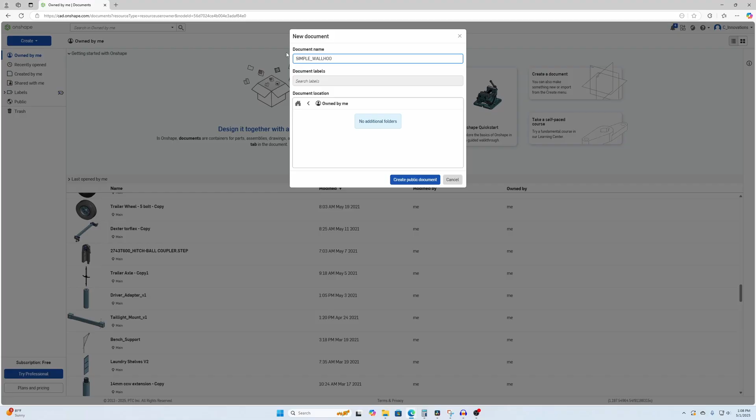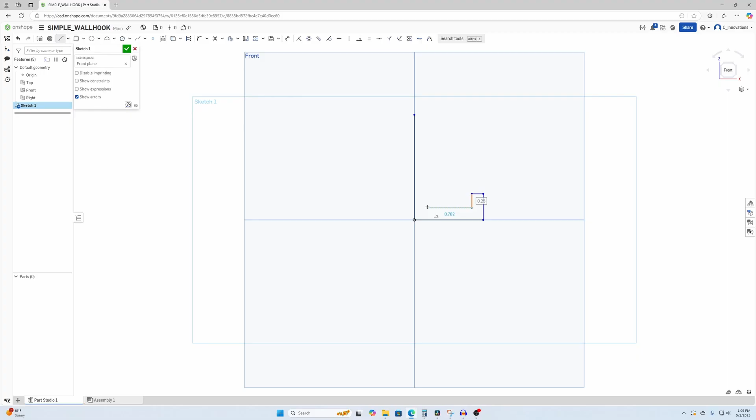Step 1, hit your sketch command. Let's go ahead and select that front plane, orient it up here, and we're just going to draw an L. We're going to use our line command, left click there, snap down to the center, make sure it's vertical, drag it over. We'll worry about the actual dimensions at the end. I'm just kind of roughly drawing in. You see I hover over there and it lets me snap out so those lines are collinear.

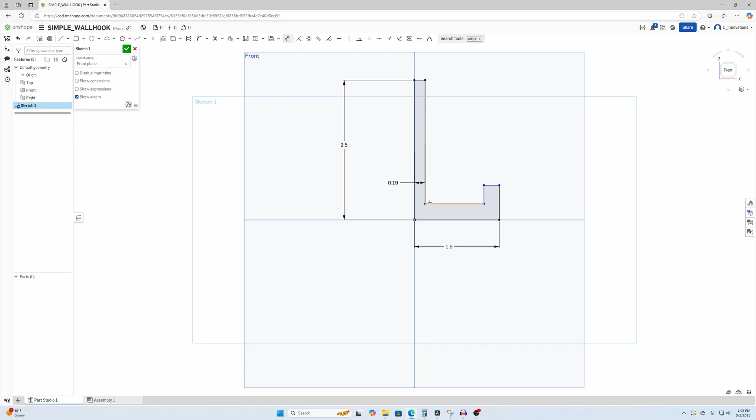So then we're going to hit the D command to dimension this thing. Let's make that 2.5 tall, 1.5 in that direction. Let's make it 3/16 thick. Three-eighths tall. There we go.

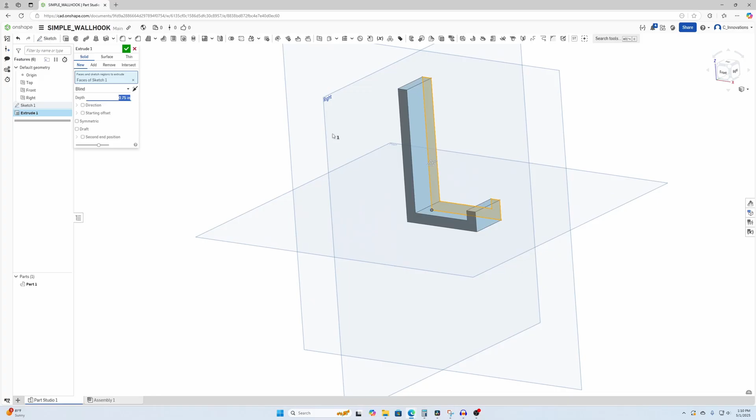Finish that sketch, hit extrude, select sketch number 1. We will make that 3/4 of an inch as an extrude. And we're going to go ahead and add our holes to this.

Hit sketch again, select that surface there. You can orient it to the right. Hit your circle command. And you see I can snap to that midpoint. Just hover over it and drag down. Create a circle, do the same thing.

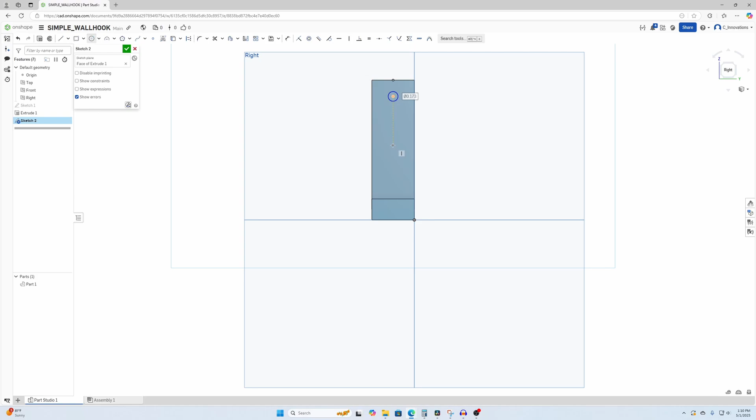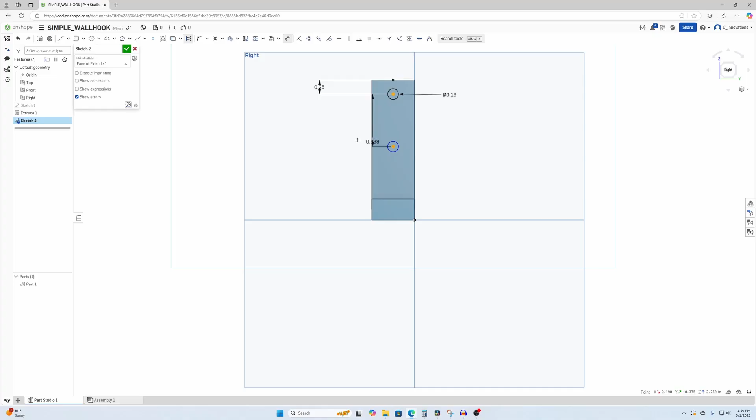I'm going to hit the letter E to make these equal as a constraint. Hit D for dimension. Let's dimension from the top. Let's do 0.25. Let's make these holes 0.19. Distance apart, let's do 1.5.

Okay, there we go. Hit extrude. Select sketch number 2. This time again, hit remove. Pushes those holes right through there. We're going to do up to next.

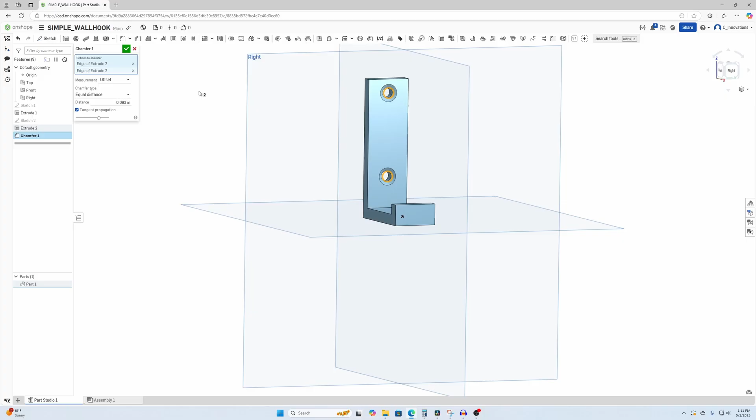Then we're going to go to your chamfer command. You don't have to do this. Makes it a little easier or a little nicer when you do like a countersunk screw. Okay, 1/16 of an inch. That should be plenty good.

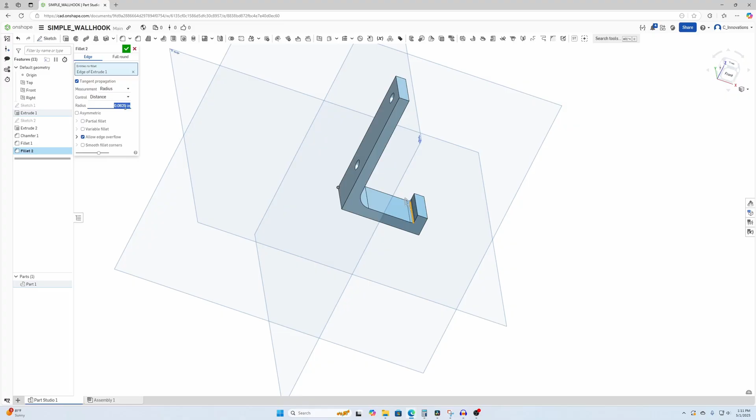Let's go ahead and add some radii in here, or a fillet to reduce the stress concentrations. Select there. Let's make that one 0.25. Let's do another fillet over here. Let's make that 1/16. And we'll do the same there.

Okay, there it is. A very simple wall hook. You can model yourself, customize however you want in a very short period of time and 3D print it.